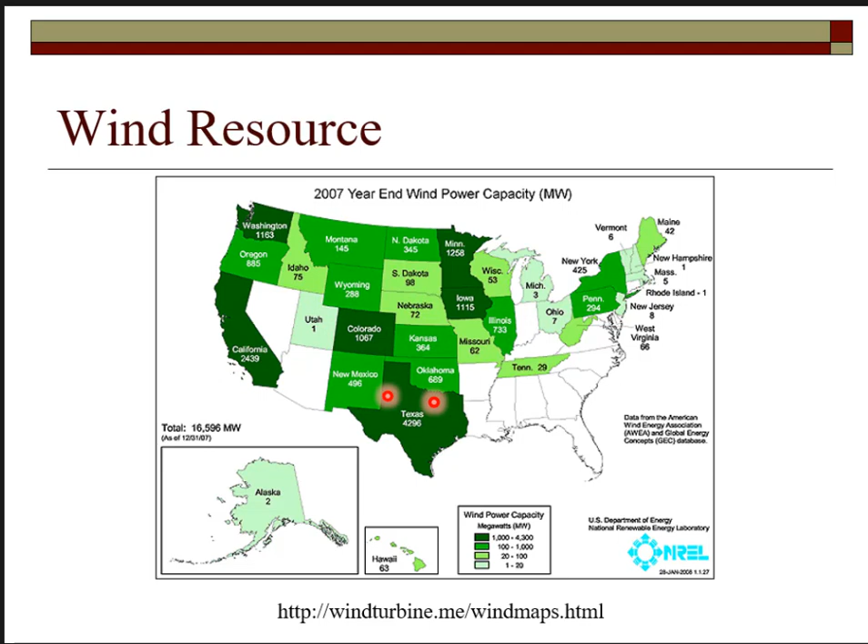Oh, well. So this is an old map, and I need to update that. And when we look at wind turbines, there's this big wind turbine, which we call utility scale, and these are what you see in these big wind farms. That's about 300 feet from the ground up to their hub, and these are maybe 200 feet diameter, huge.

Then there are industrial and commercial wind turbines that are a little smaller, and those are primarily for a facility. And if you go up and take, what is the beltway that goes around Columbus? Is that 270? Yeah. And when you're going up, if you look off to the west, you'll see there's a turbine that's like this, attached to something, but anyway, it's there. And then you have a residential grade. So huge, big, and small.

If you go out west on 40, out to Dole Farm, he has 10 kW Bergeys there. And that's what this shows. You can't just build it, you gotta—because it's so tall, there's not many places you can put it in. You have to be so far from the property line, and there's permits and zoning and all that.

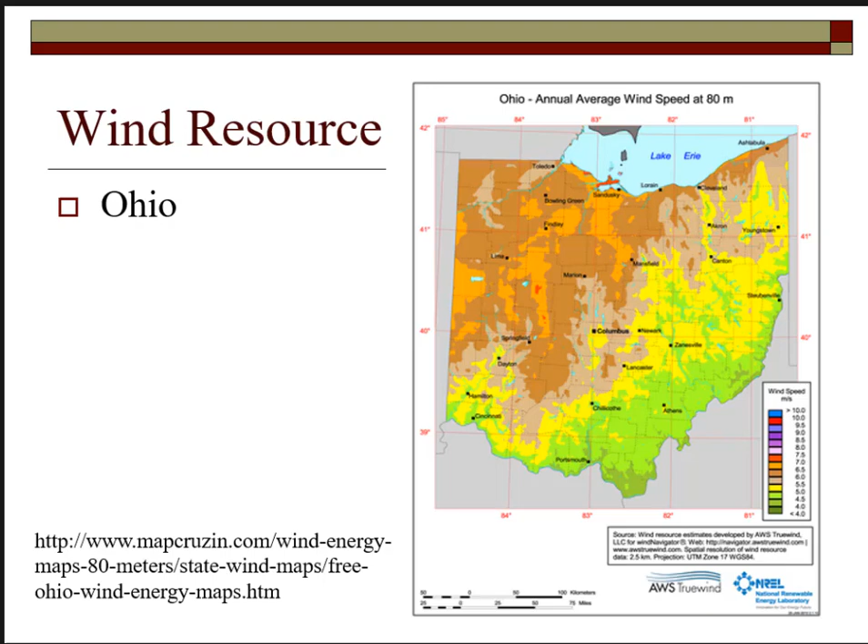This is Ohio, and it shows Ohio has decent wind resource up here. Now, one thing about wind resource, down here in the Dayton area, we say we do not have that much wind resource, and we really don't. That doesn't mean you can't go 5 miles outside of town, up on top of a big tall hill, and have wonderful wind, even though the average Dayton area doesn't have that much wind resource. So it's like real estate, location, location, location. You really have to do a wind survey before you put in a wind turbine.

This is Cleveland, Great Lakes. You get a lot of wind coming off the lakes.

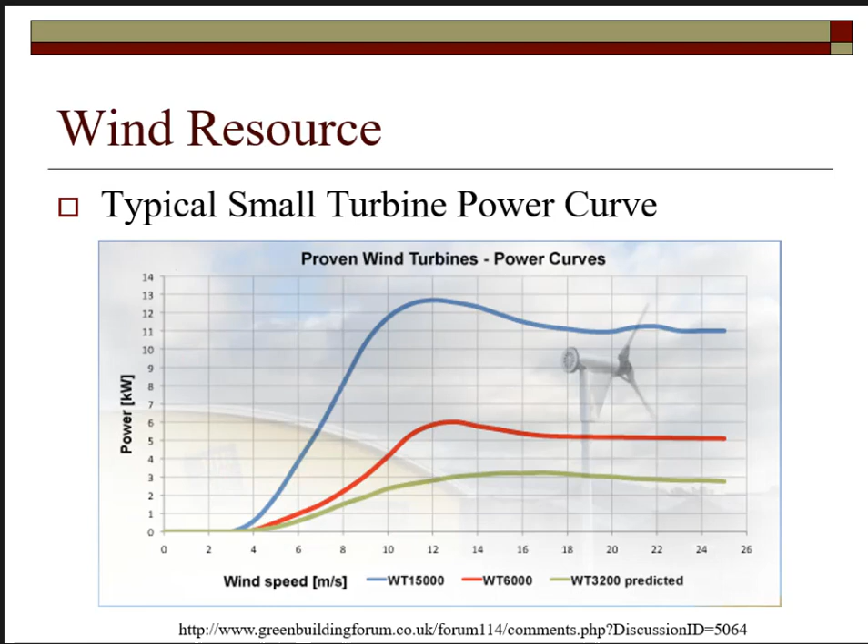So not real straightforward. We won't learn that in this class, we're just aware of it. That's as far as we go.

They would fix those blades if they lost their engines, and bring that helicopter down probably about 45 miles an hour, just by controlling those blades' pitch.

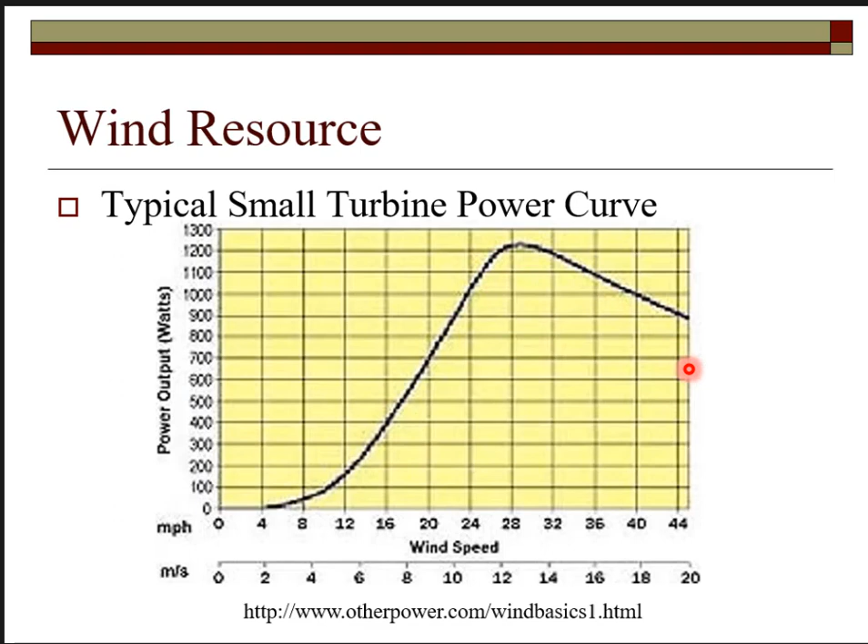This is another typical curve on a small wind turbine. This was a short lesson, I'll go on to the next one.

So that was more about wind resource, and this gets into more about turbines and performance. This is a horizontal axis, 3-blade horizontal axis, and this shows that this particular design probably has blades that can turn so it can control that attack angle of the wind.

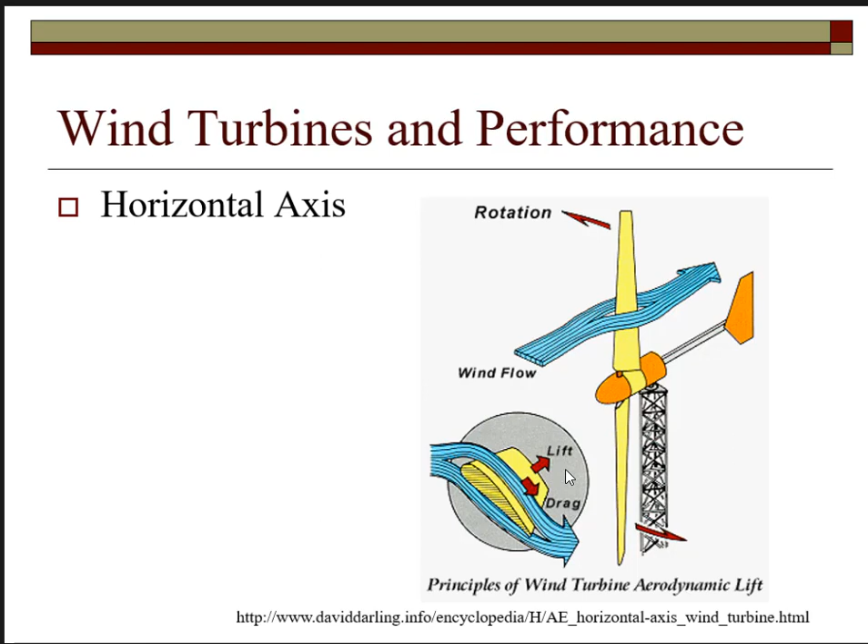Horizontal axis, and all of our utility scale wind turbines have horizontal axes. Our wind turbine has a horizontal axis. A lot of small scale turbines, like this Bergey, also have that horizontal axis, so it's really the more popular style.

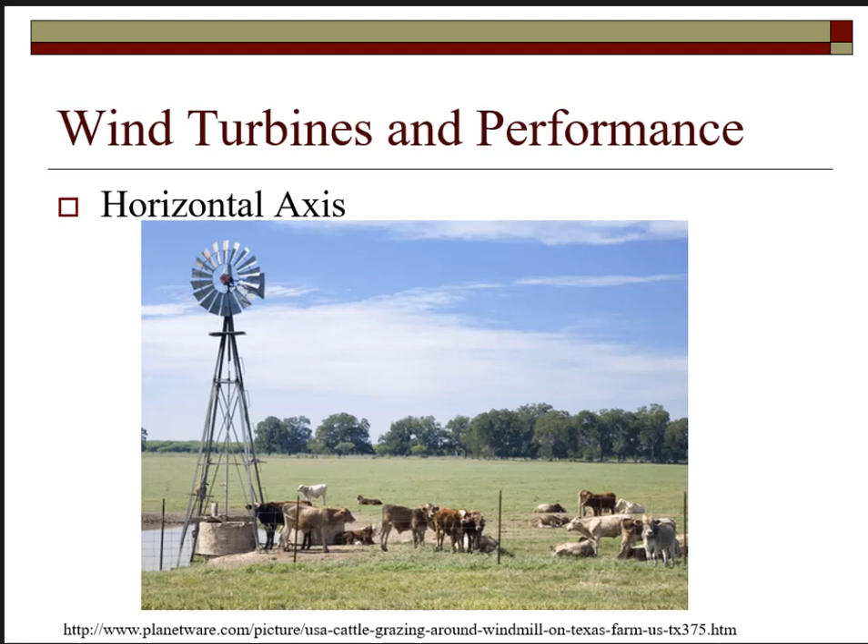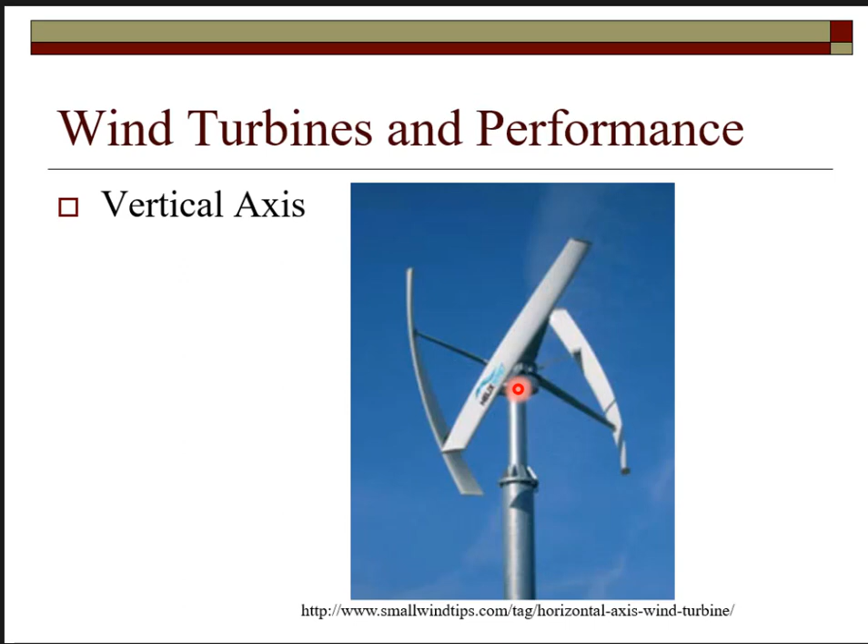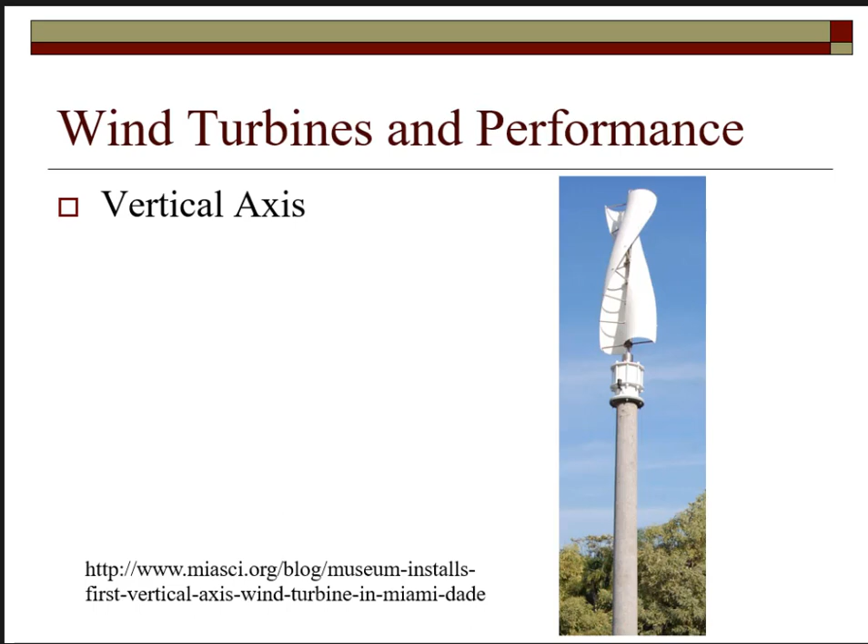Now, I know all of you know the formula for kinetic energy from physics, right? Kinetic energy, that's energy, like a gallon of water is a gallon of water. It's 1/2 mv squared. So kinetic energy is a function of velocity, or speed, squared.

But we want power, and power is energy per unit of time. So we have to divide this by time, per unit of time. Let's put in mass flow rate, that's mass per unit of time. V stands for velocity, M dot stands for mass flow rate. Mass flow rate is density times the area times the velocity. So for power, if I take rho times the area, that's the sweep area of the blade, times the velocity, and substitute it back into this equation, I get 1/2 rho A velocity cubed. Velocity cubed.

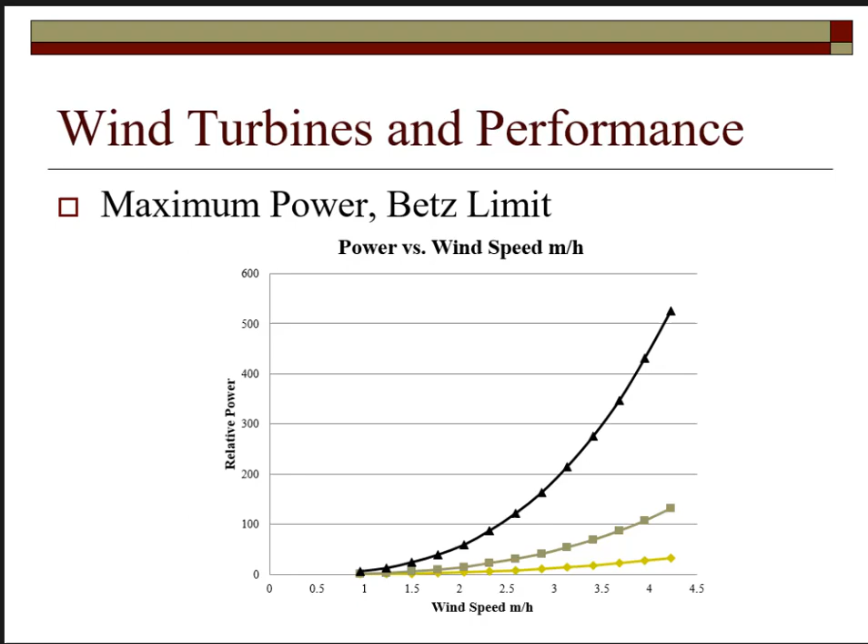Now, this is the maximum power of the wind, but you can't capture all of it. Theoretically, you can only capture 59% of it. Nothing is 100% efficient, so theoretically, we can only capture 59% of the power of the wind. So remember that, 59%. This is just some examples of some different wind turbines.

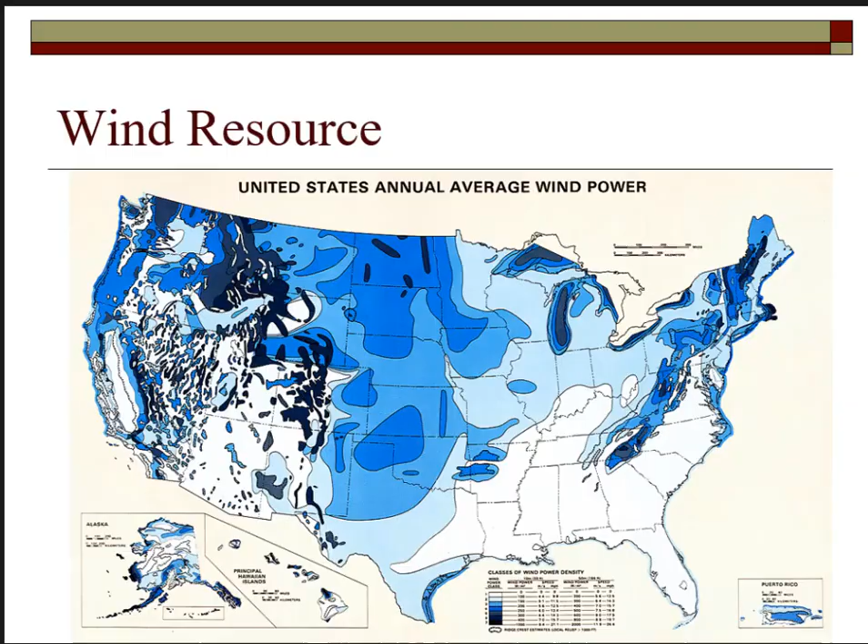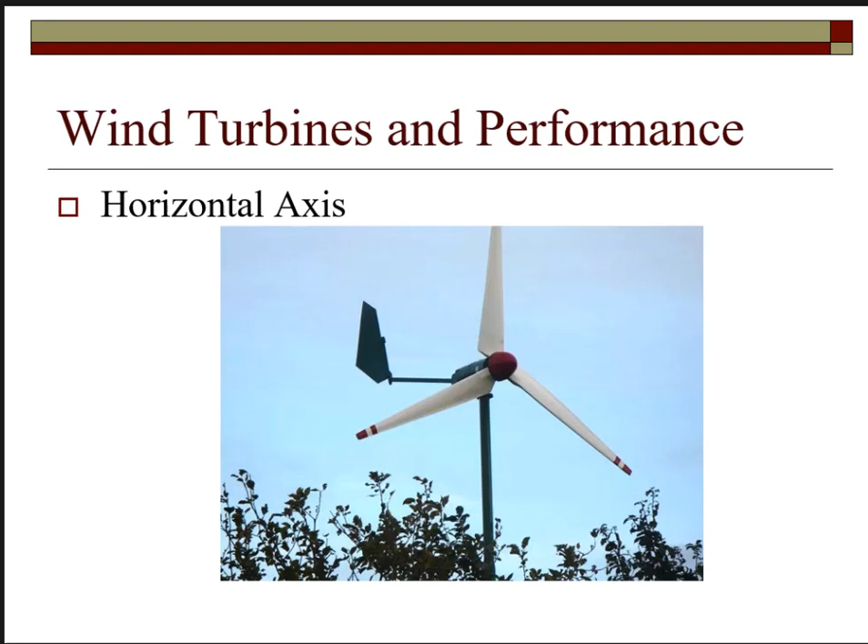This goes to some calculations, because I know everybody loves calculations. So this starts off, you've seen this before, and this, and this, and this, and this. And this is where we developed this wind power density, and we said we can only capture 59% of it.

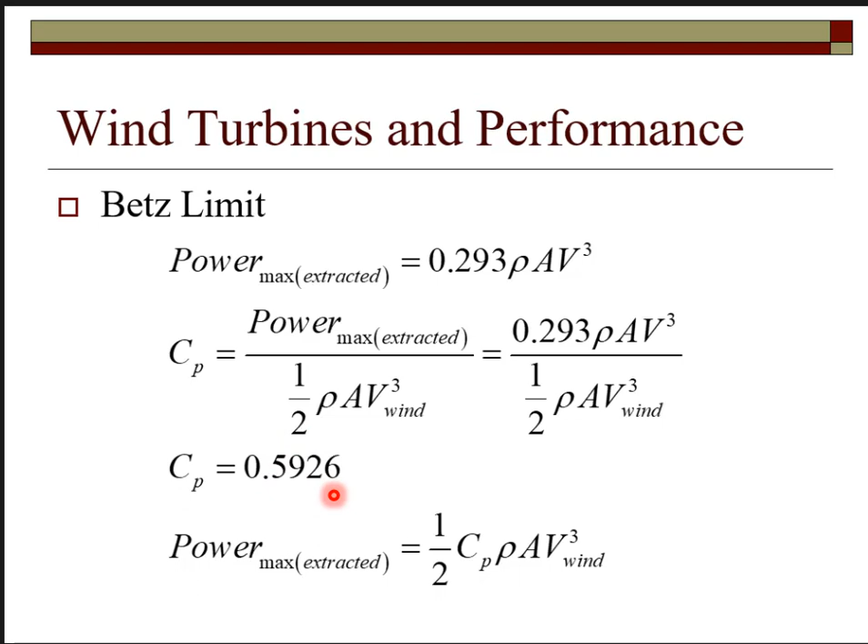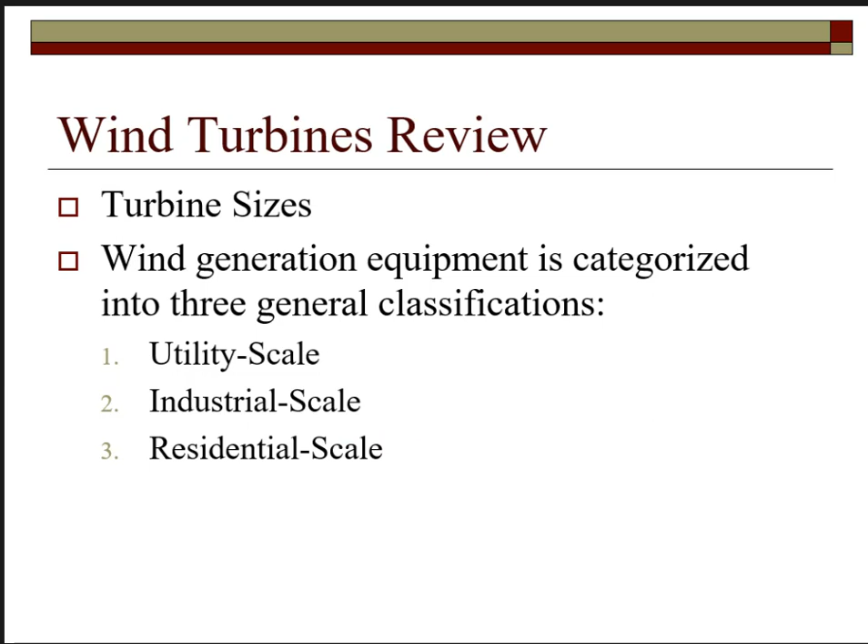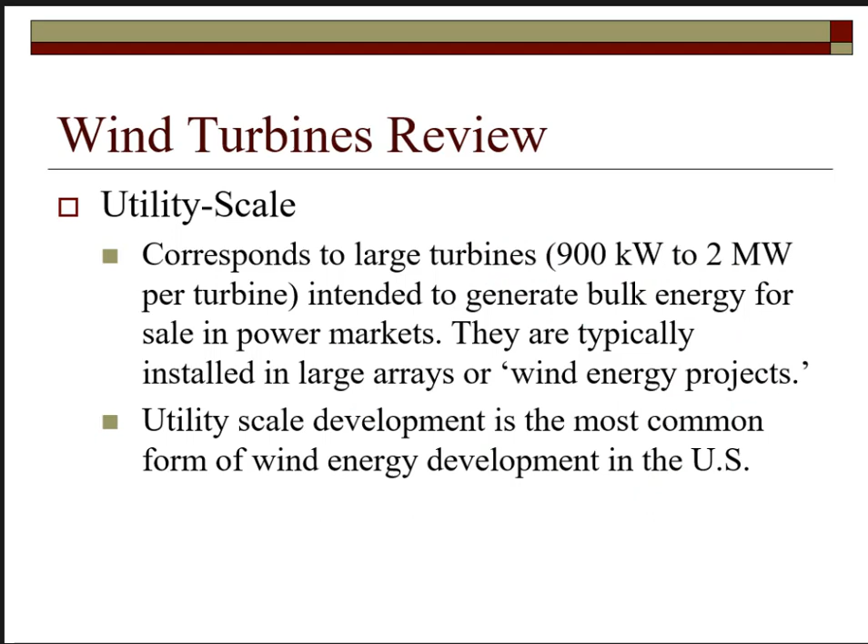Let's get through this part. There are different types of wind turbines. We have utility scale, industrial scale, and residential scale, which we went through. Utility scales are now in megawatts, huge. This is 2 megawatts, that's a utility scale. And I need to update this. This was... look at the blank space.

We use wind turbines. I think Florida definitely should. Hurricanes would blow them down, though. So make them stronger.

So this is utility scale, goes up to 13. Nationally, we have a lot of wind turbines. We used to lead the world, but China passed us up some years ago.

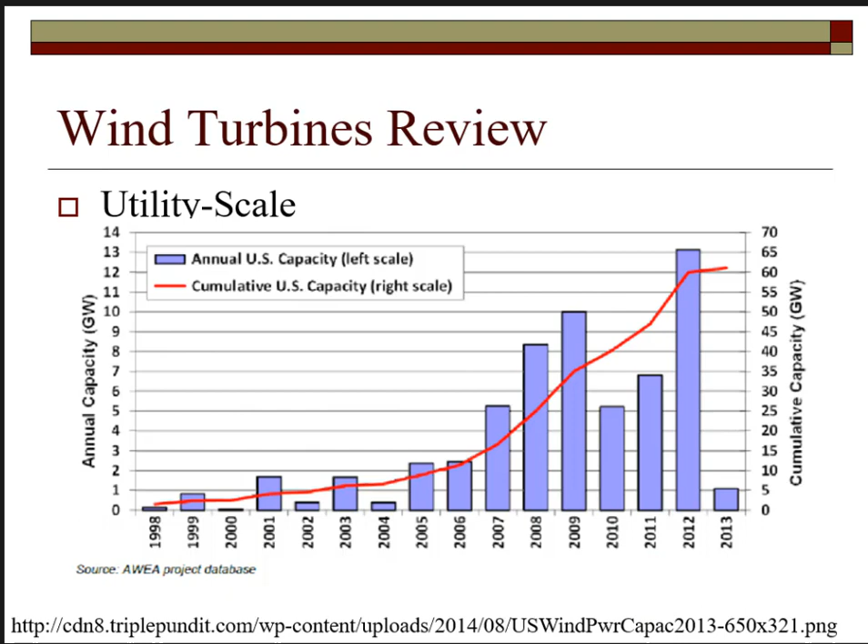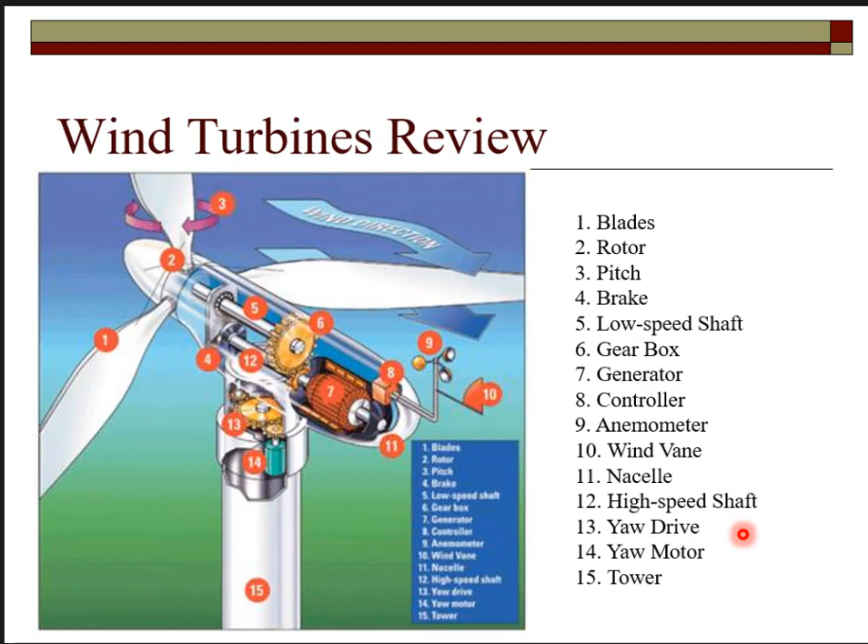On my way down to Chicago, my family drove through a turbine field. My sister was just in awe, and I was like, you know these are, right? She said, yes, I do. I was like, you weren't saying these are so large before. She said, no, I was not. I knew they would be big and large, but man.

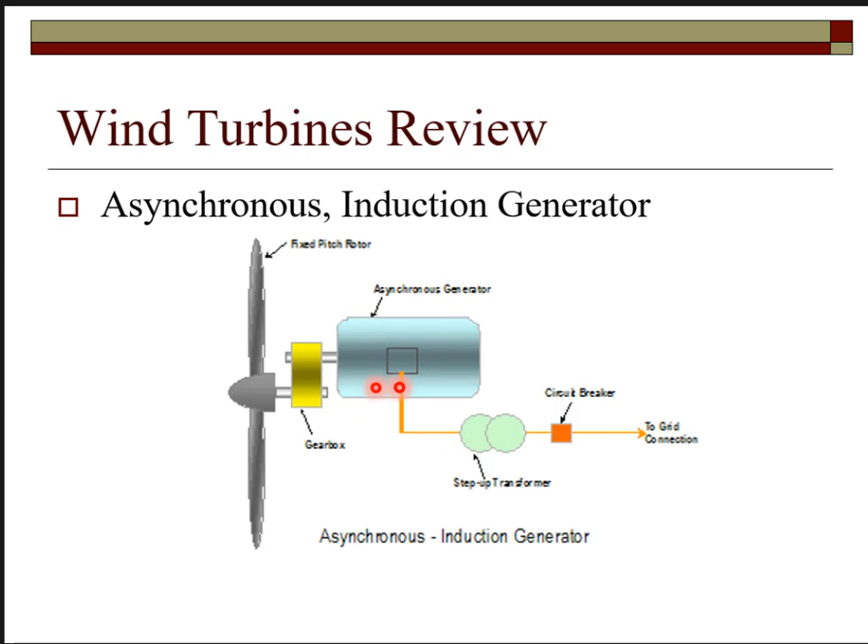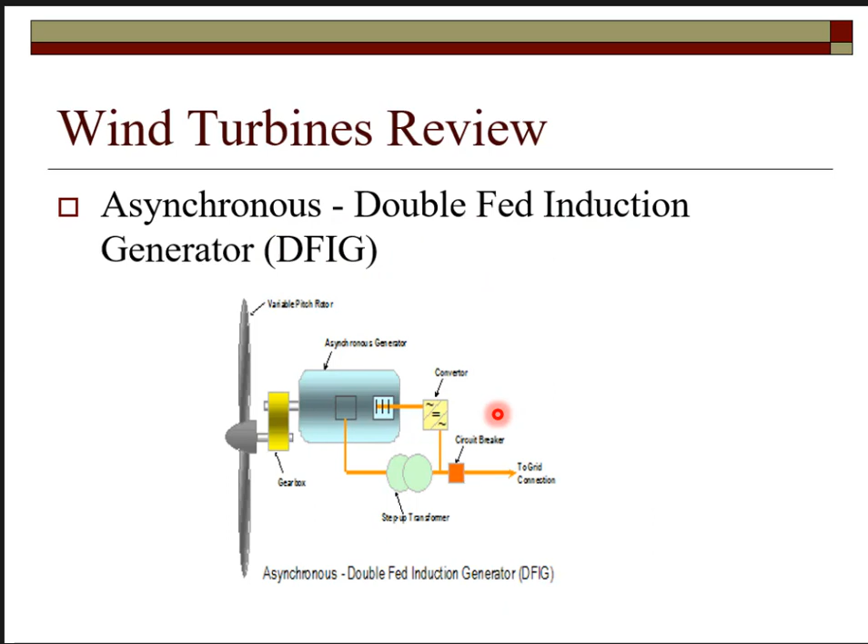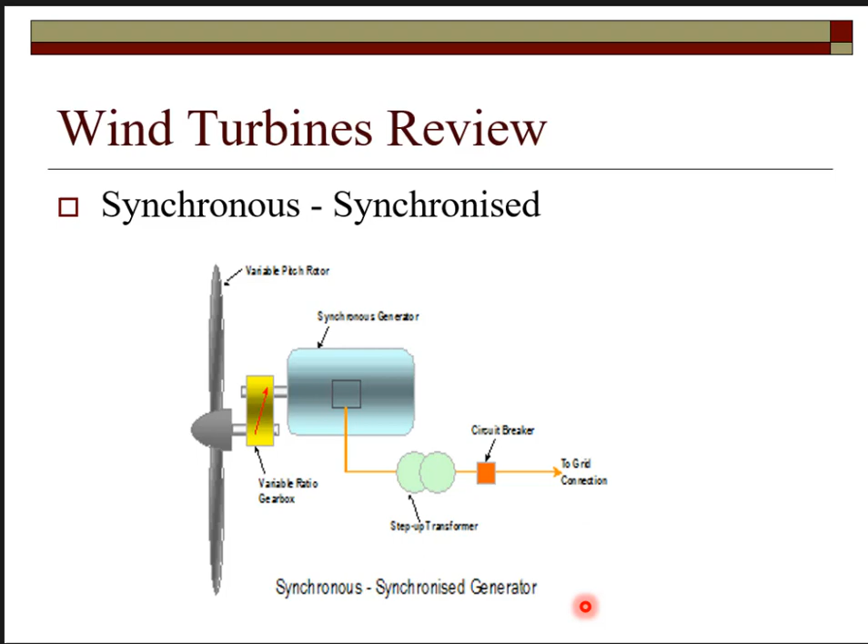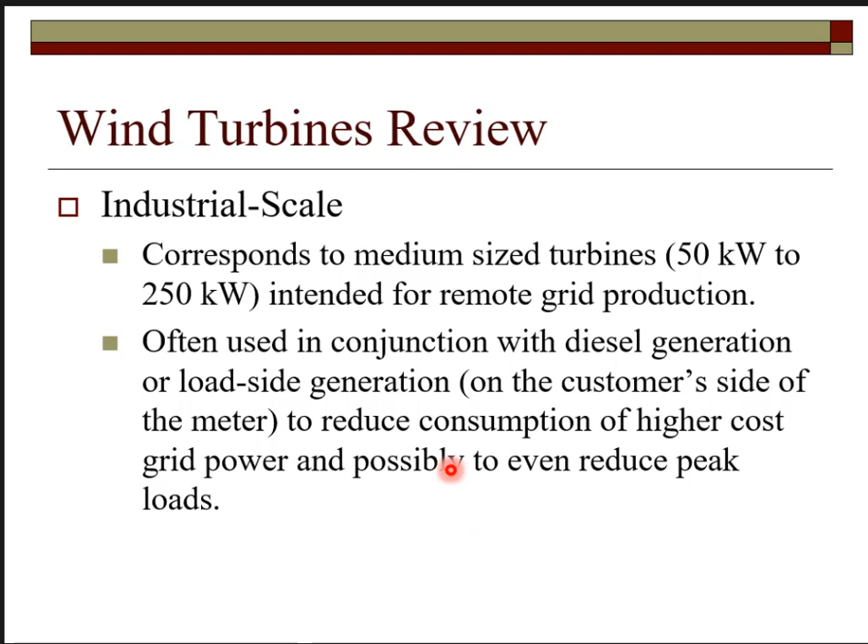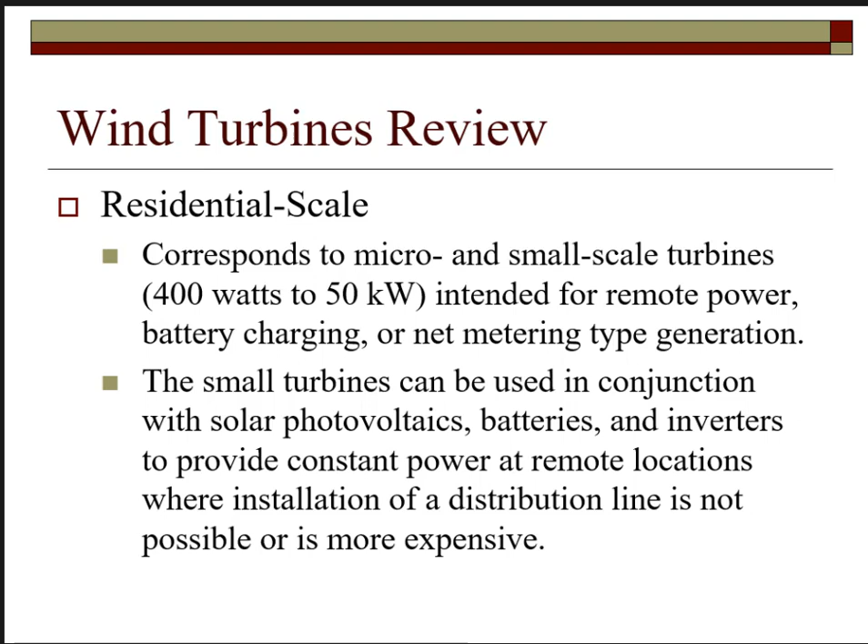Here's an industrial scale, we looked at before we looked at utility scale. So this is an industrial scale, and then we have a residential scale. So we started off, we divided them into utility scale, industrial scale, and then residential scale.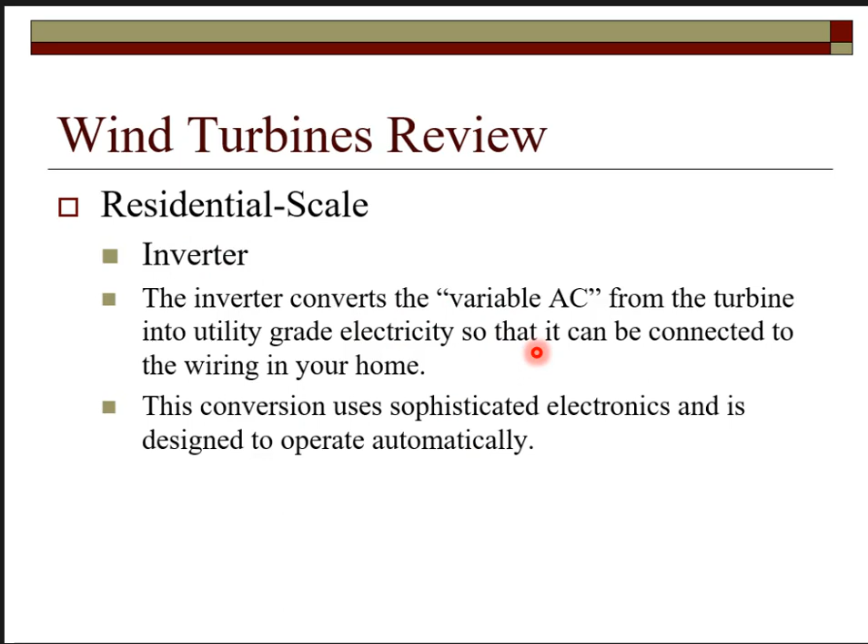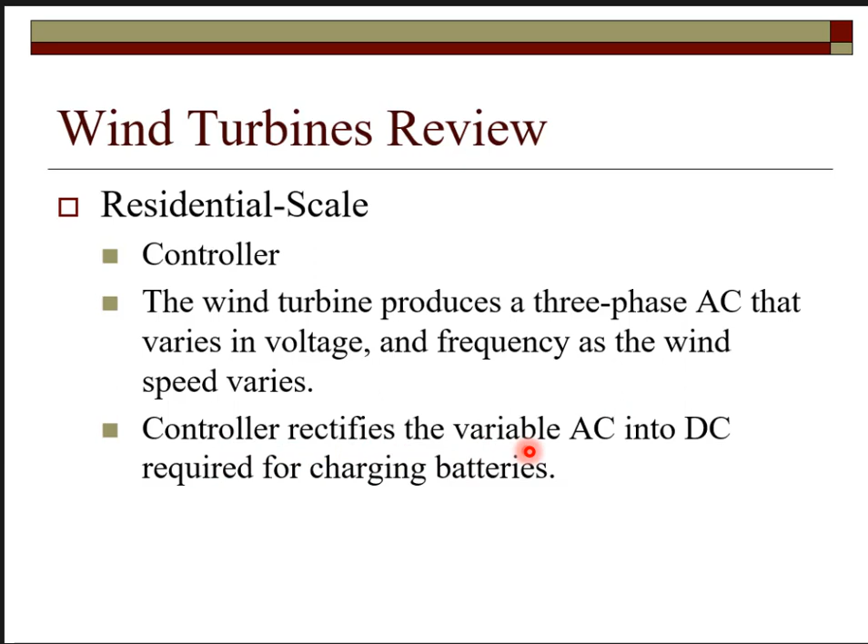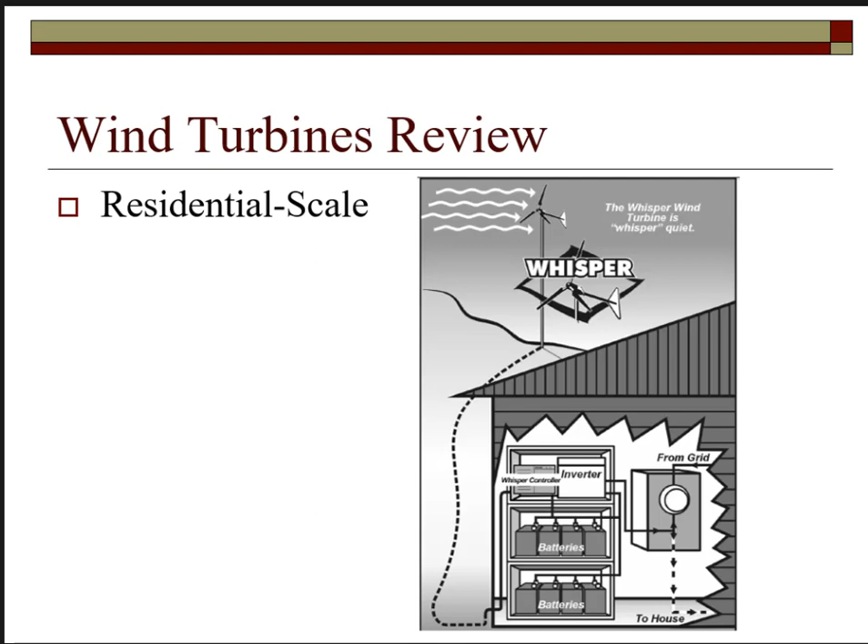On a residential scale, they have an alternator. The alternating current is converted to DC and then converted back to alternating through the inverter, just like on a solar PV. There's a controller, wind speed sensor. The wind turbine produces three-phase AC that varies in voltage and frequency as the wind speed changes. The controller rectifies the variable AC back to DC, and then it's inverted back to 60 cycle AC. This residential alternator diagram shows that alternator.

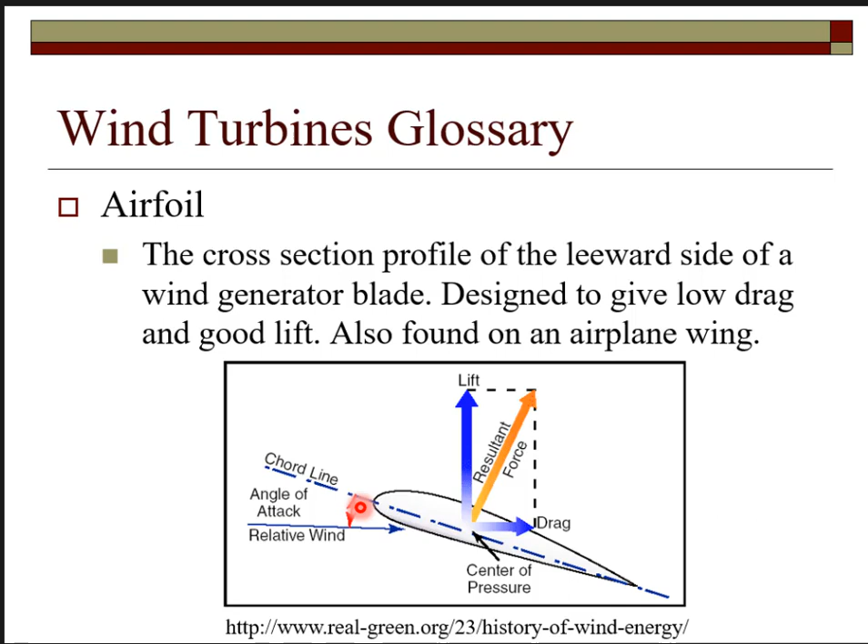This shows the airfoil angle of attack that I referred to. That angle of attack changes as the speed of the turbine changes. This is an anemometer, measures the wind speed. We have one up on our mast - go over there and see what our wind speed is, up on that upper box, see if we got any wind out there today.

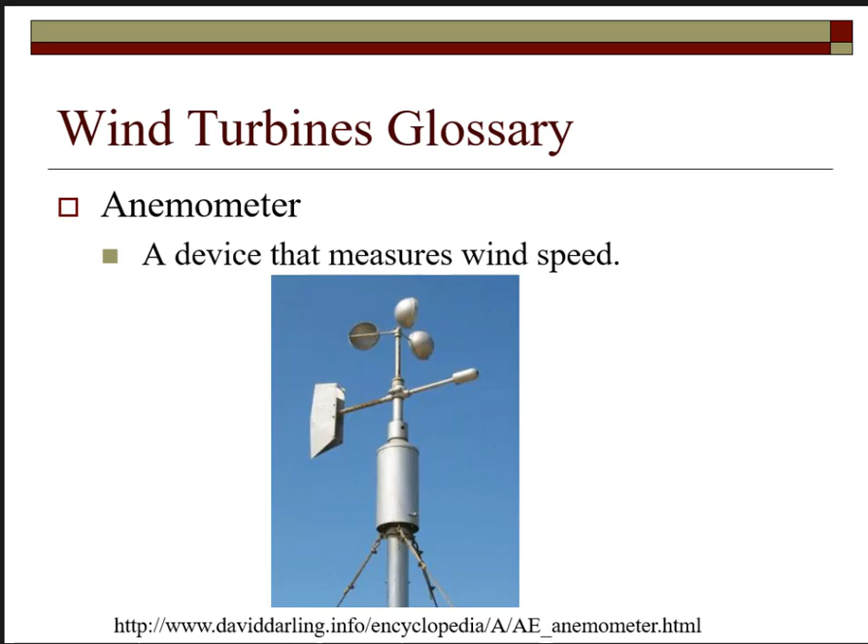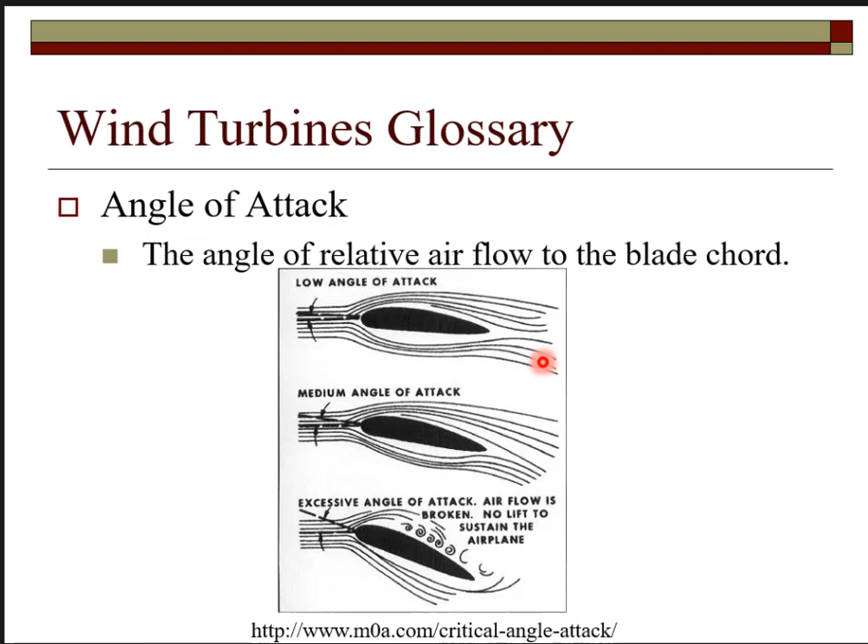Then this is a glossary of terms. That's angle of attack - that's the relative direction of the wind with respect to the blade. Now, the Betz coefficient - that's that theoretical 59%, which is the maximum possible energy you can obtain from the wind.

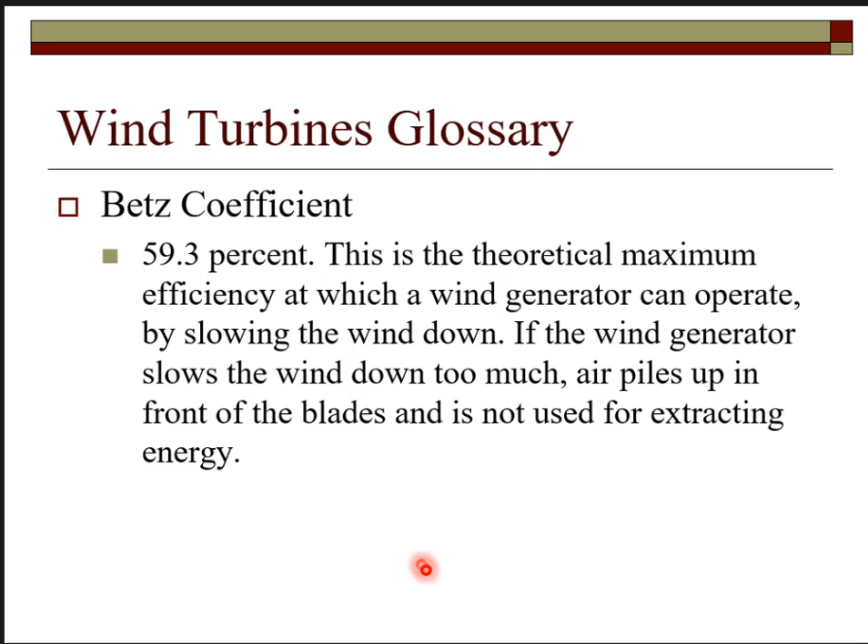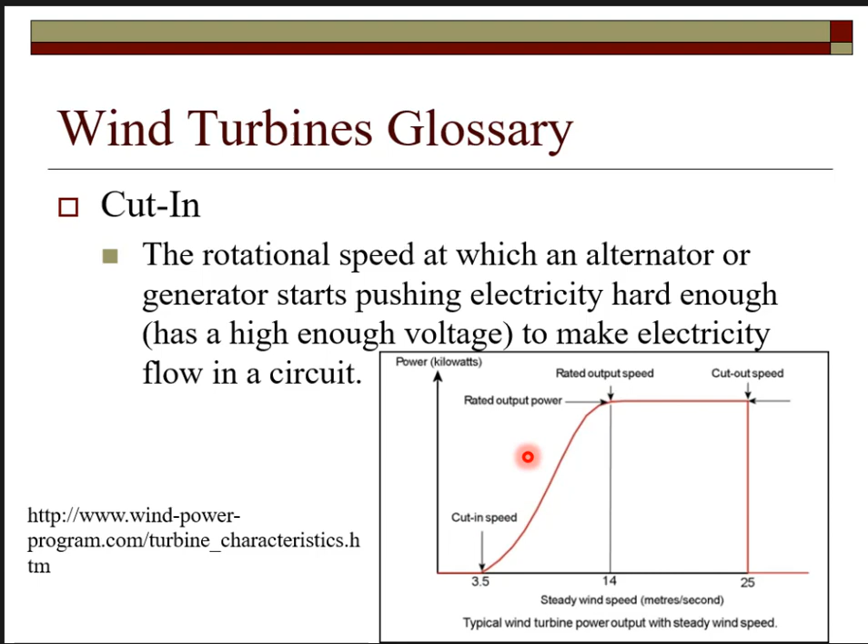Braking systems in them. Cut-in speed - on this particular example is 3.5. Dump load, that's like our heat sink back there, that aluminum thing that's hanging on the side of the building. If our wind turbine is producing current and the brakes can't stop it and the batteries are fully charged, it will divert the load to that heat sink that you see back there. They call it just a dump load - that's just something that eats up your excess electricity.

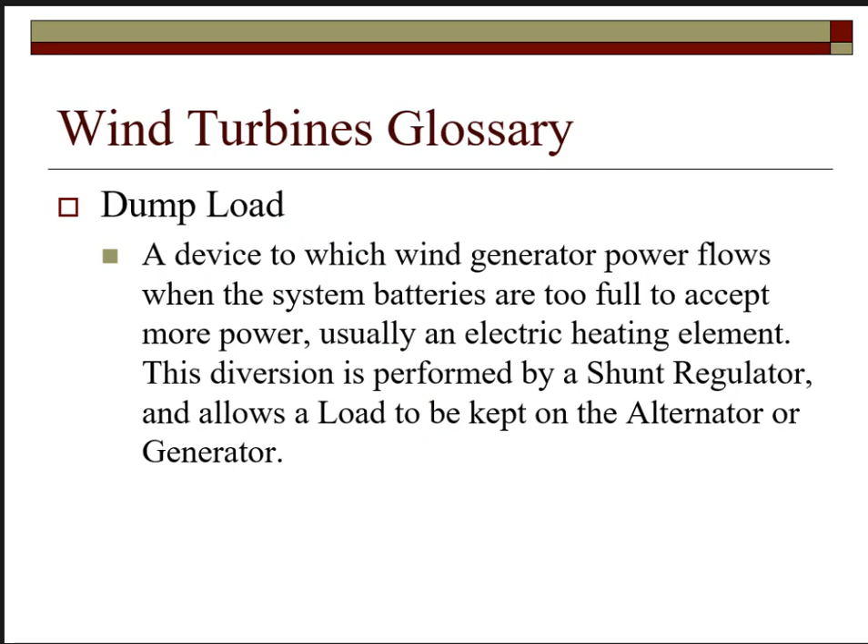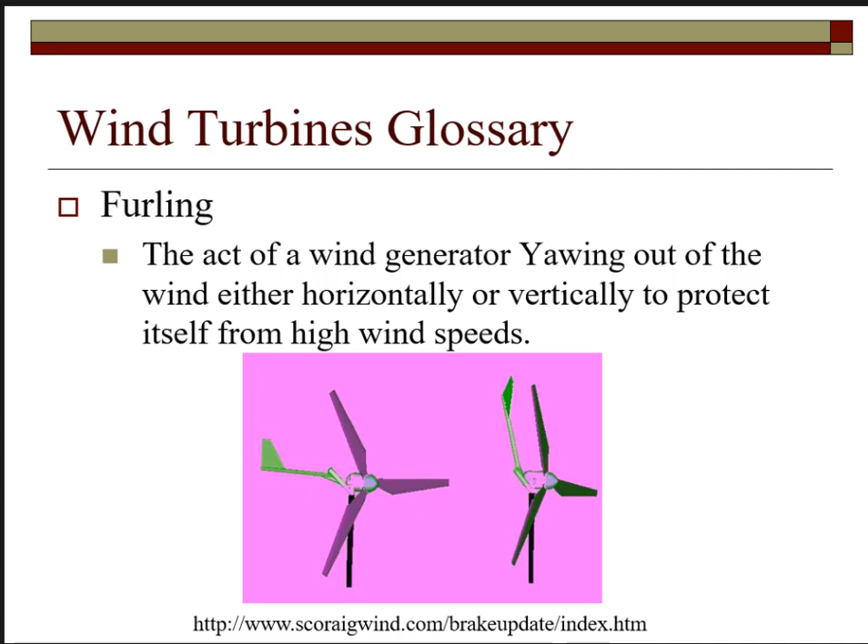Then we have furling. If you look at this turbine sitting here in the lab, it's hinged. When the wind speed gets to a certain speed, over its design speed, it will just collapse and the blades will be parallel to the wind and they'll quit turning. They call that furling - they just collapse and set the blades parallel to the wind, so they no longer face the wind. You can see here where it's collapsed. That's a tail, and that's a furling tail on the back of it.

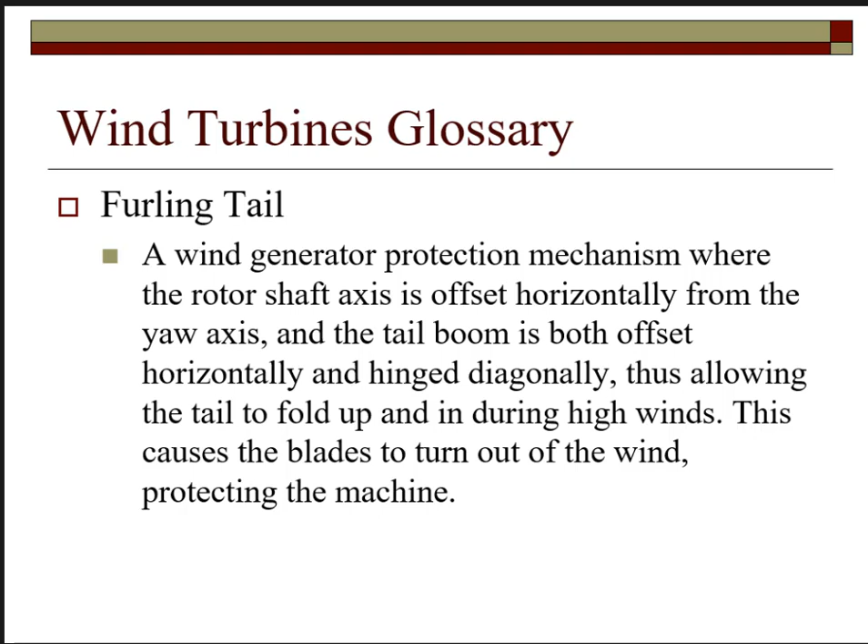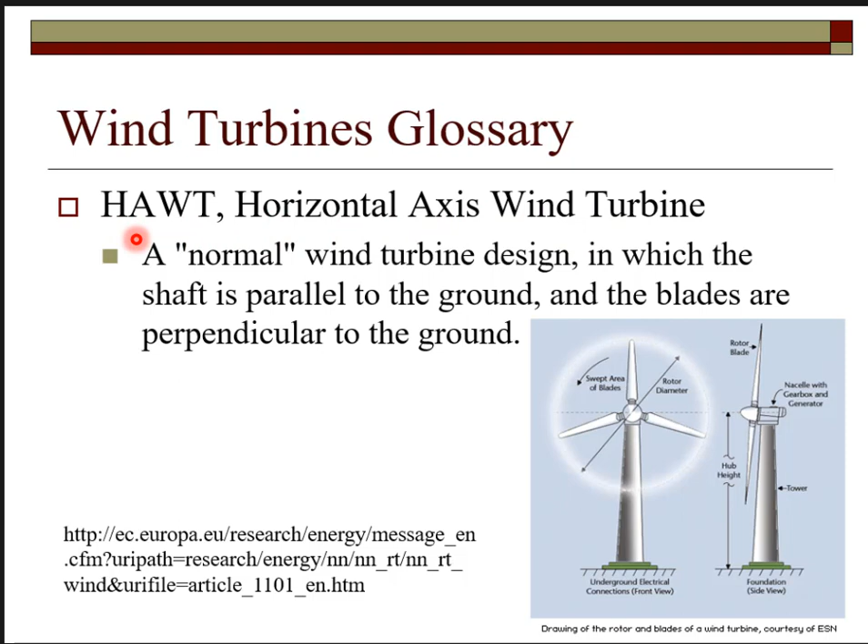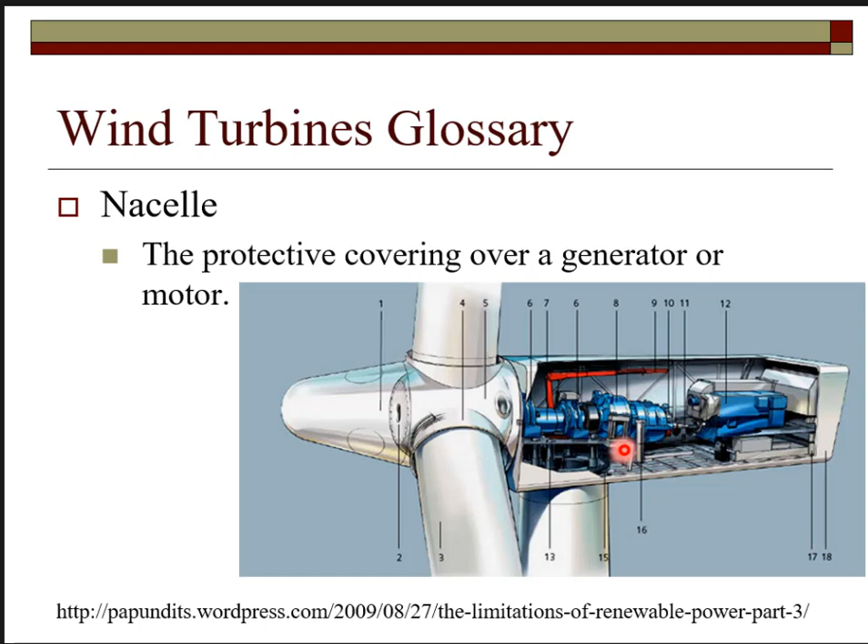HAWT, horizontal axis wind turbine - most popular type, 3-blade. Nacelle, that's that big bus-sized piece on top of a utility scale turbine, has all the components inside it.

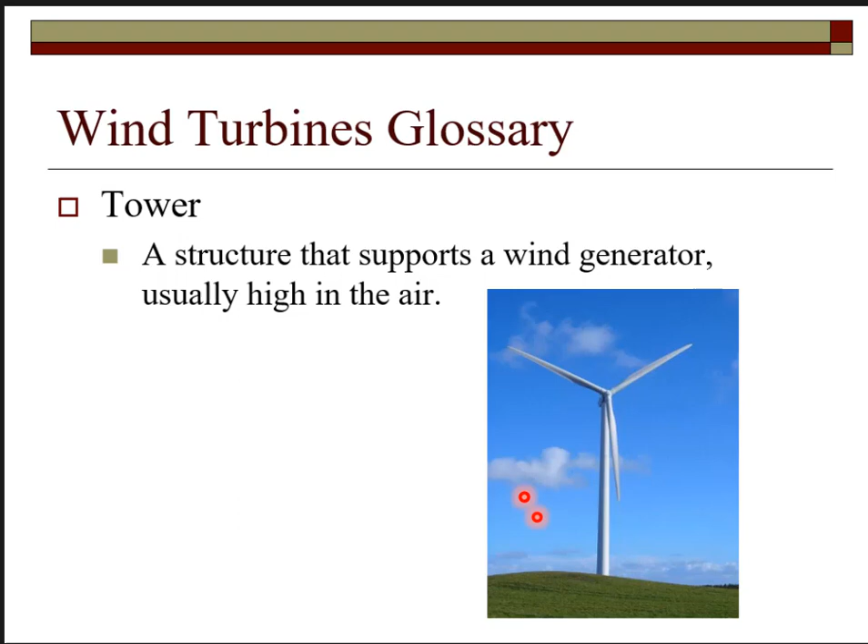Since we're dealing with electricity, volt amp is simply the volts multiplied by the amps without factoring in the power factor. Who knows what a power factor is?

If you have electric motors in a plant, those electric motors, because of their windings, store and release energy. So what happens is...

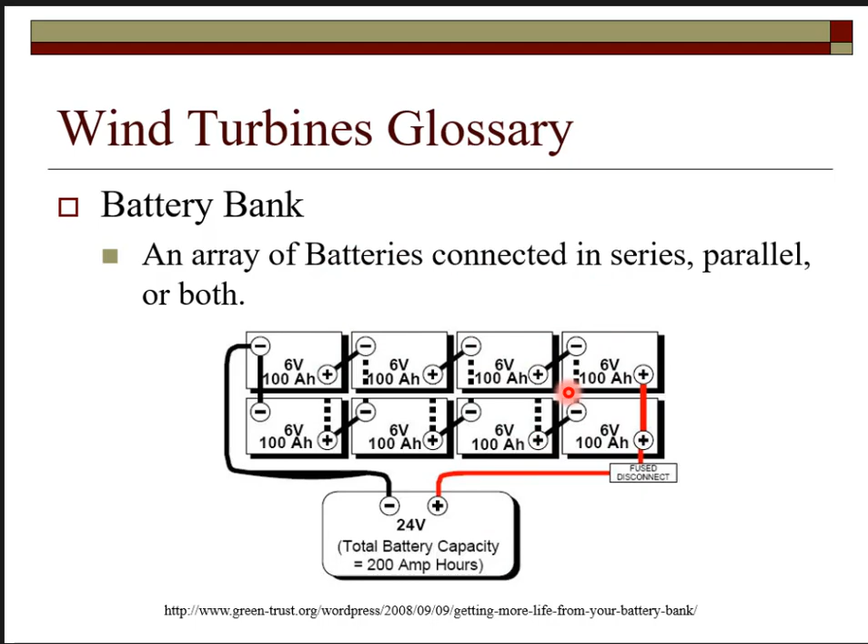This is an array of batteries connected in parallel and series. I think we've gone through this before with the solar PV.

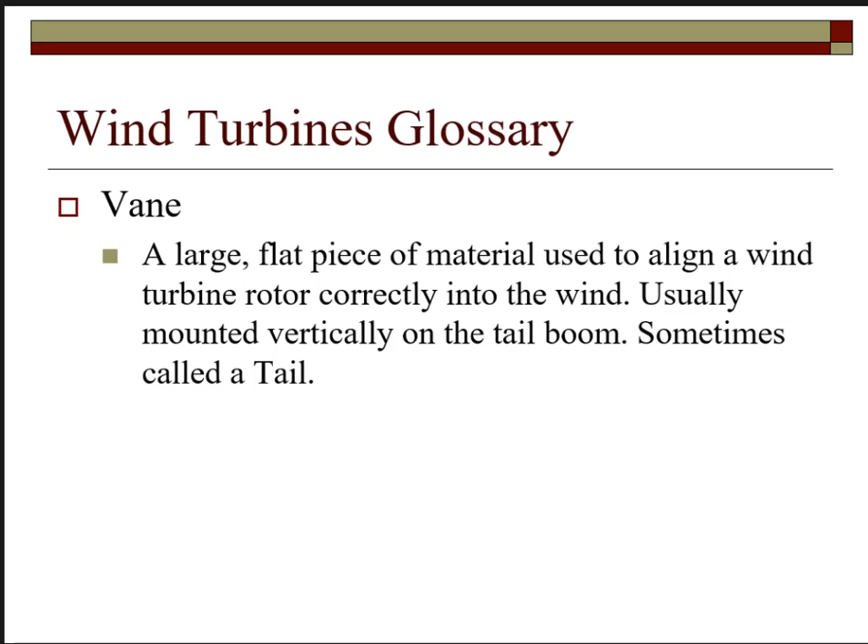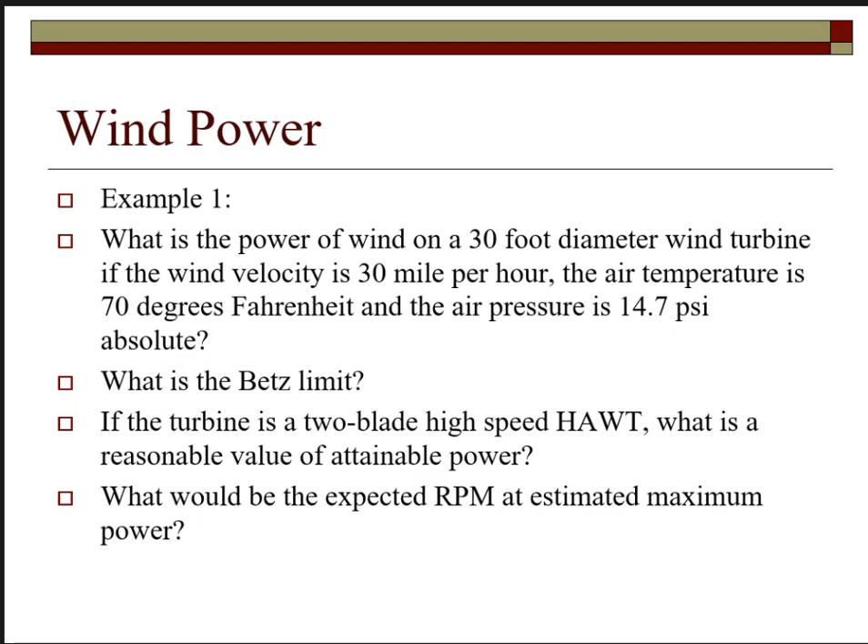So let's back up here. How many blades did I say it had? A two blade — so let's go back here, this is a two blade. With a two blade, I can't get 0.59, I can only get maybe 0.47, about 47%. So in reality, from this, I get 0.47 times 95, multiplied by 0.47. I'm going to call it 45 kW.

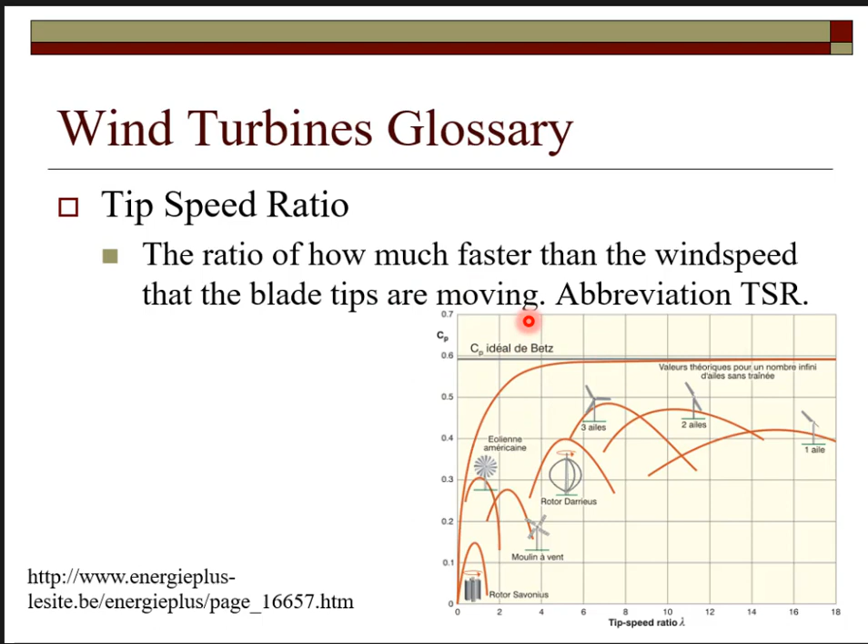So I just wanted you to kind of get a feeling for some numbers and magnitudes. I don't expect you to work these, but kind of understand where it came from.

We used this equation, 1/2 rho A V cubed. 1/2, this is the density of air divided by gravity. Area of the circle is pi D squared over 4. And the velocity is 30 miles per hour, that's number one state. The rest is just units conversion.

So the maximum power of the wind is 95 kW. I can't capture all the power of the wind. Theoretically, the maximum power I could extract from the wind would be 56 kW. But since I have a two-blade turbine, the maximum I can extract from the wind is 45 kW, a little less than half.

That's a pretty big turbine. So this is the important number to remember.

It's not proportional to the average speed. It's proportional to the average of the cubes of the speed, and that's the wind power density. So if someone wants to talk about average wind speed and production of a wind turbine, you know that's not the right number. You want to look at the cube of the speed, and they call that wind power density.

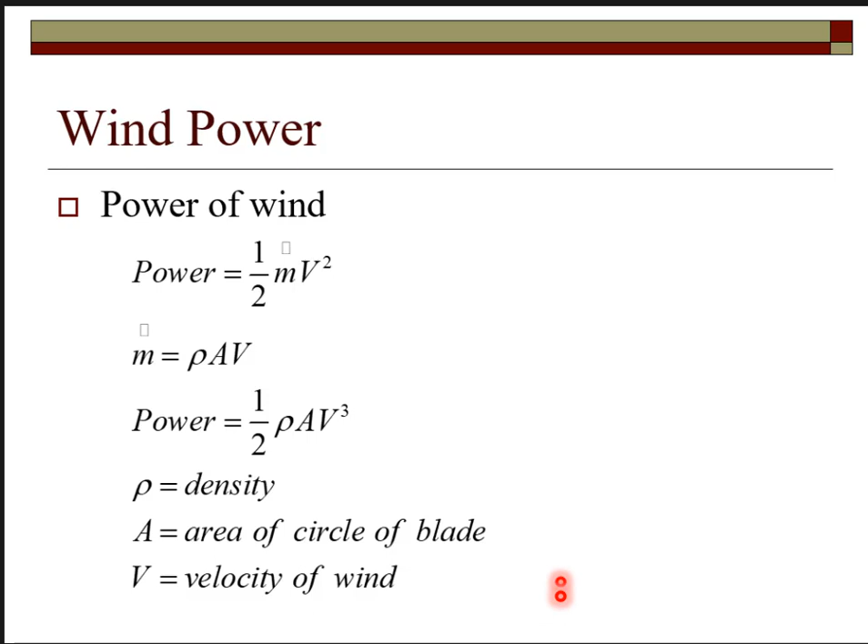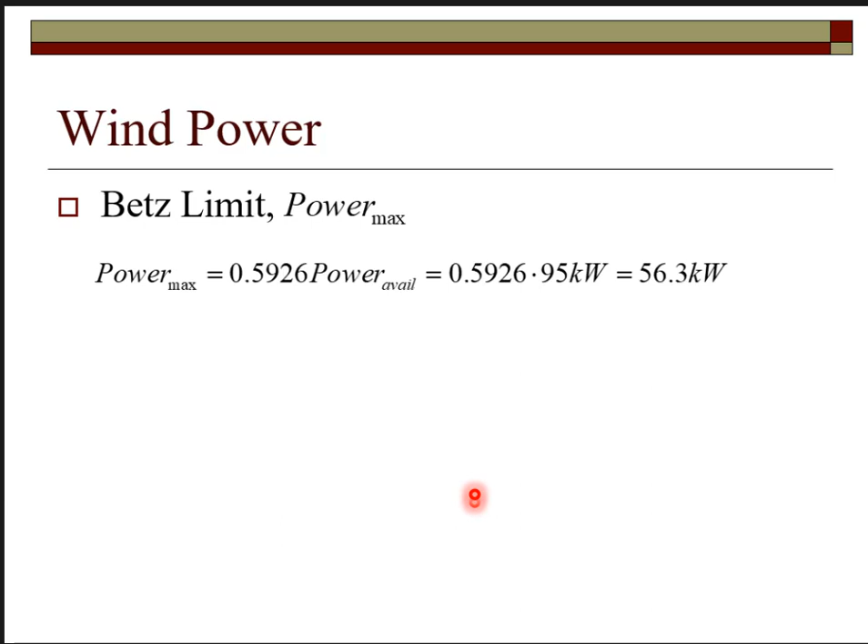So I think I ran through all of this. There, 95. 56, that's the maximum theoretical. And 45 kW, so that's the answer we got.

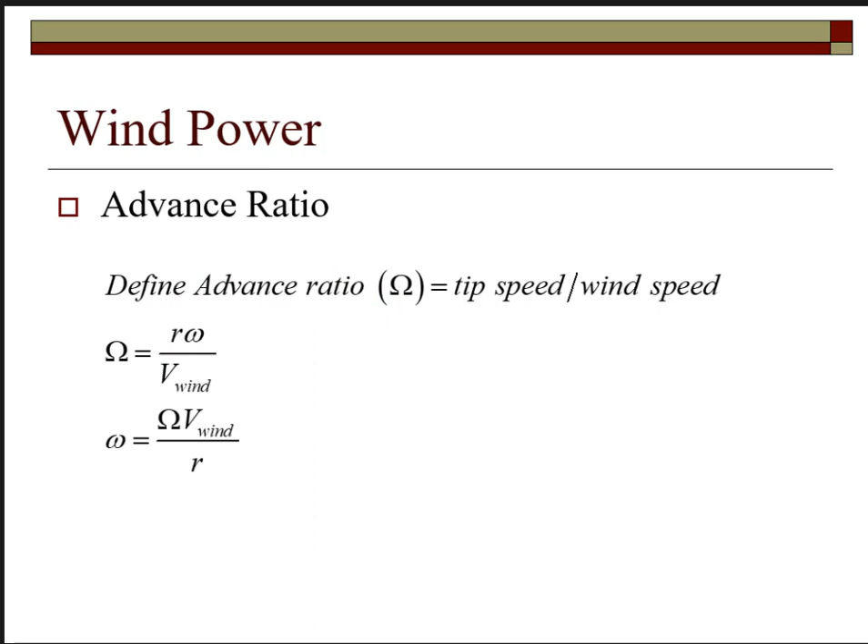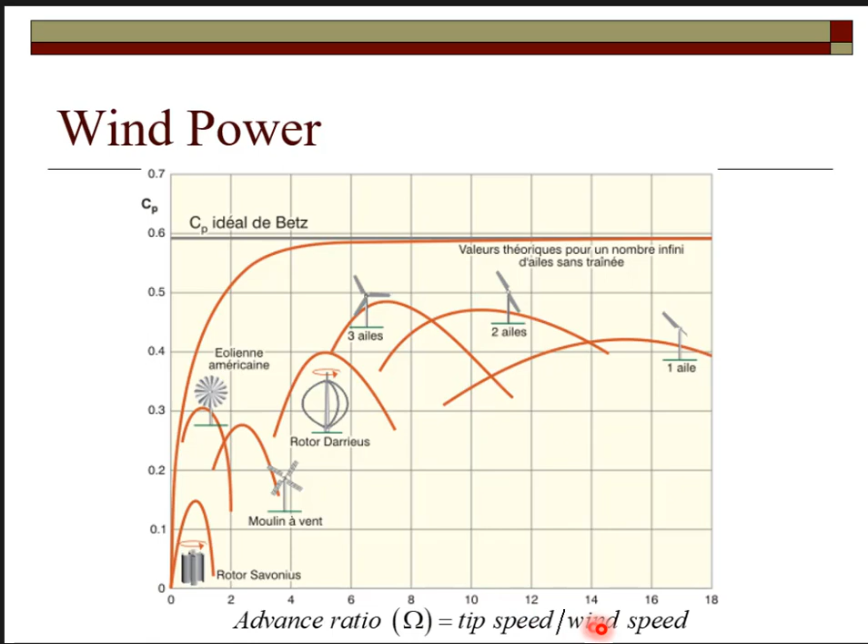I'm not real interested in you calculating that wind, but if you do go through, just to show you, this is it's called the advance ratio, that's the tip speed over the wind speed. So we go right up here under this 2 blade and we say, well, at the maximum power, that ratio is probably 10. Means the tip speed over the wind speed is probably about 10.

So we go through the calculations, and that will be about 294 revolutions per minute. That's a lot for those big blades.

What is that? Is that about 5 revolutions per second? That's getting with the program, isn't it? 5 per second, 60 seconds per minute. Yeah.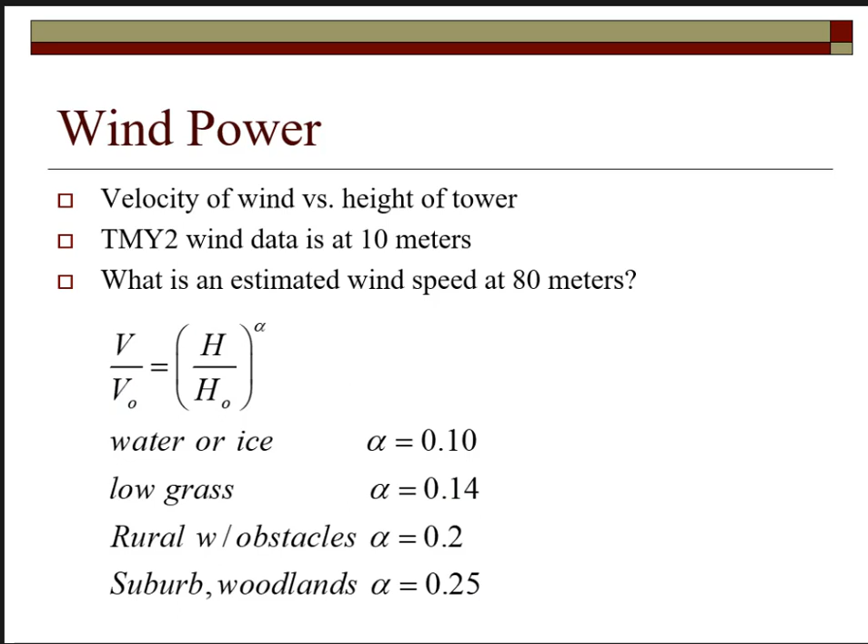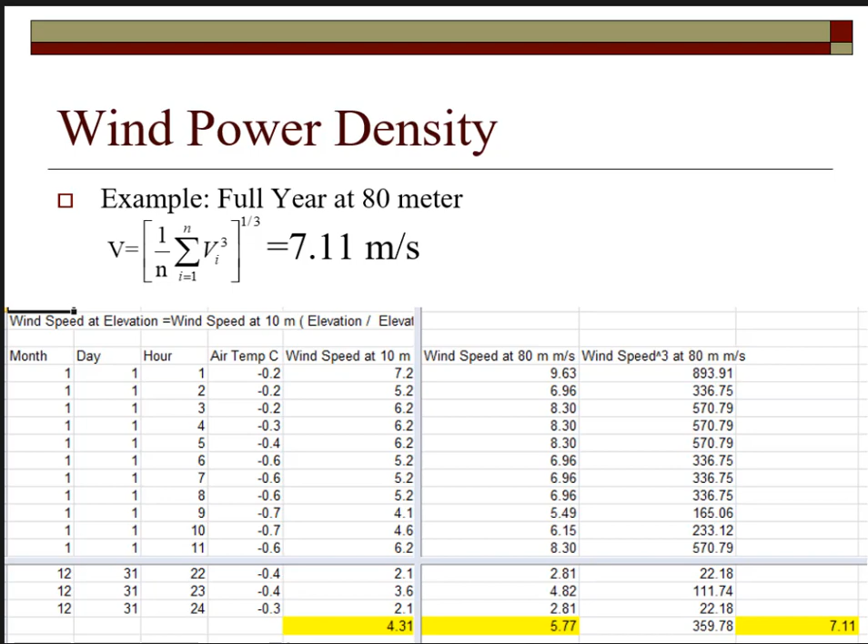And this goes to the wind power density. I'm not going to have you calculate that. We can go through and calculate, what would that calculate? At 80 meters, we calculate the speed associated with the wind power density V was 7.11 in the Dayton area. And that's not a homework assignment. I don't expect you to do that. Any questions?

I just want you to develop appreciation. There are different sizes of wind turbines: utility scale, industrial scale, residential scale. There's horizontal axis wind turbines, there's vertical axis wind turbines. The power of the turbine is proportional to the cube of the speed of the wind, not the average, but the cube of the speed of the wind. And we can calculate or estimate what the speed of the wind is at other elevations if we know what the speed is at certain elevations.